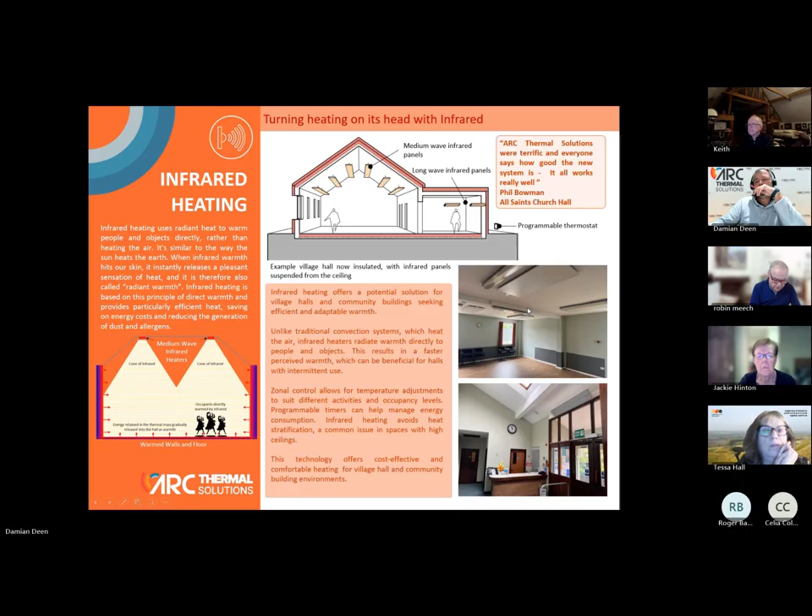Lost sound. Oh, Damian, you're on mute. There you go. Yeah, that's better.

Good. Some halls have acoustic tiles, and we have a hall in Oxford somewhere, I can't remember the name of the hall, but the entire ceiling is full of acoustic tiles. And we were able to install the heaters below the acoustic tiles and suspend them as well. So it can be done. We just need a clearance. In most cases, you need a clearance of 300 mil off another fitting. So in this case here, you can see the light fitting and the heater are over 300 mil away from each other. And the heater is a tad lower as well. This hall is in Nottingham somewhere, if I remember correctly.

So Tessa, can I, because I can't see the questions when I'm doing this presentation. No, I'll do it. For some reason I lost it, but I'll be reading the questions out. Don't worry. That's all right. If there's any more there, that's fine.

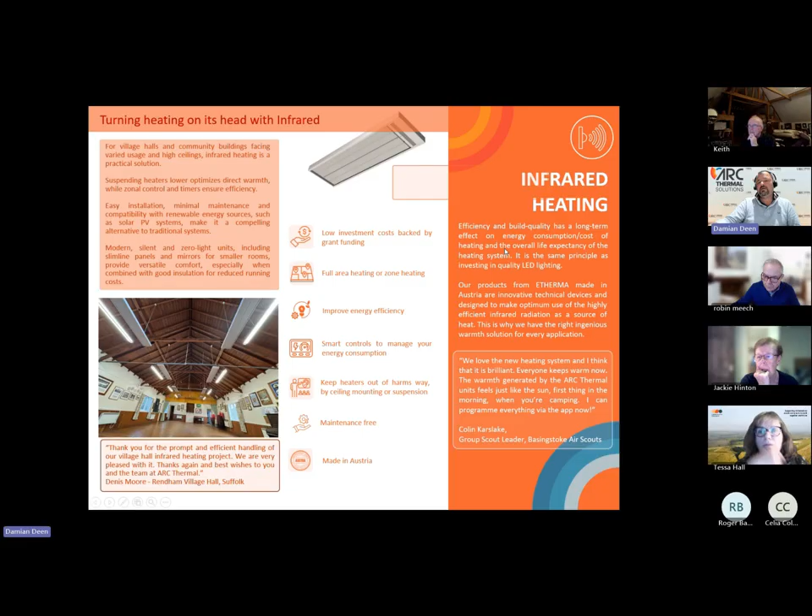So with infrared heating, obviously it's electricity you're dealing with, and if you're able to integrate solar PV with a system, and the cost element is there, that's fine. I would suggest looking at solar PV as well as an integration. Multiple halls in the past have done that, and they've installed not only PV but storage to go with it as well, which means that you can use the power as you need it.

And if you have storage, then great, you can use the stored power in the night when you might have an event, because most halls do have events in the night. You might have film clubs, you might have your social engagements. And I know Alice have just done their solar, so that will be helpful for them in the future as well. Does that make sense? Do you want me to walk through how solar works, or is everybody happy with knowing the integration of that?

Well, I love the fact that you can power the infrared heating with solar panels. But you would need a battery probably, especially for the winter months, wouldn't you? Some cases it's prudent to have a battery, some cases it isn't. And I don't know about these things, but is the infrared heating quite easily powered by the solar PV without a battery then?

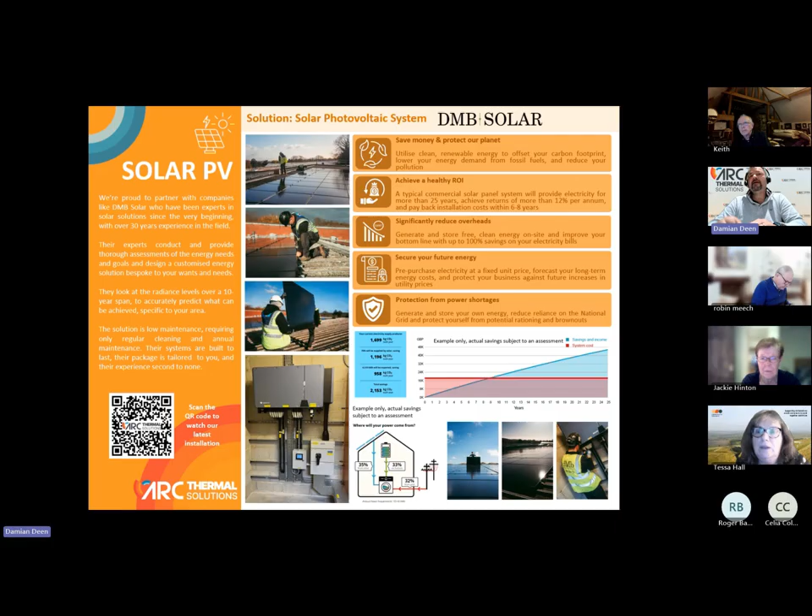So I'll show you a little bit about the surveys that we do and all that stuff, but basically it's a comprehensive offering that we try to put in place for customers. When a customer approaches us, I had a hall approach me this morning, and the first thing I would do is have a conversation with them and just find out a little bit about the hall, a little bit about what heating is there, and get that information. Once we've gathered all that information, we tend to produce a desktop proposal for that customer. I could show you one.

And once we produce that desktop proposal, we'll then take it to the customer and say, this is what we think is the best solution for yourself. These are the cost implications. Is this something that you are likely to be happy with, or is it something that doesn't seem possible? If the customer thinks that is something that they would like to pursue, then we would do a full survey, double check all our assumptions, make sure that everything is, you know, as is, and then sign that off with the customer. And the customer then says we'd like to proceed.

Then we would make a visit like we did today to double check with our installers and see where the heaters are going to go, what positioning, what time of day we can install, where we can store the heaters. Go through the whole planning process at that stage, and then we send that back, and the customer then agrees, and then we move forward. Then we have after sales service as well, which Jackie saw you earlier on today as well. Any other questions?

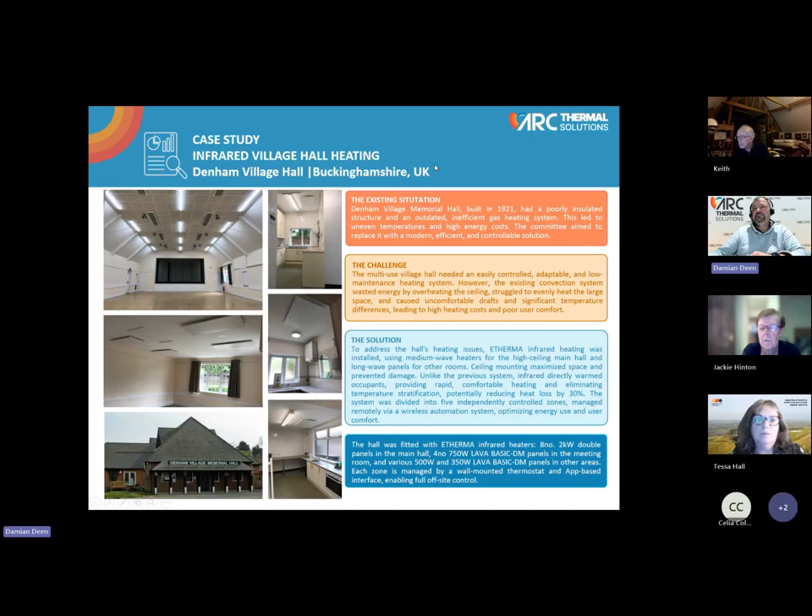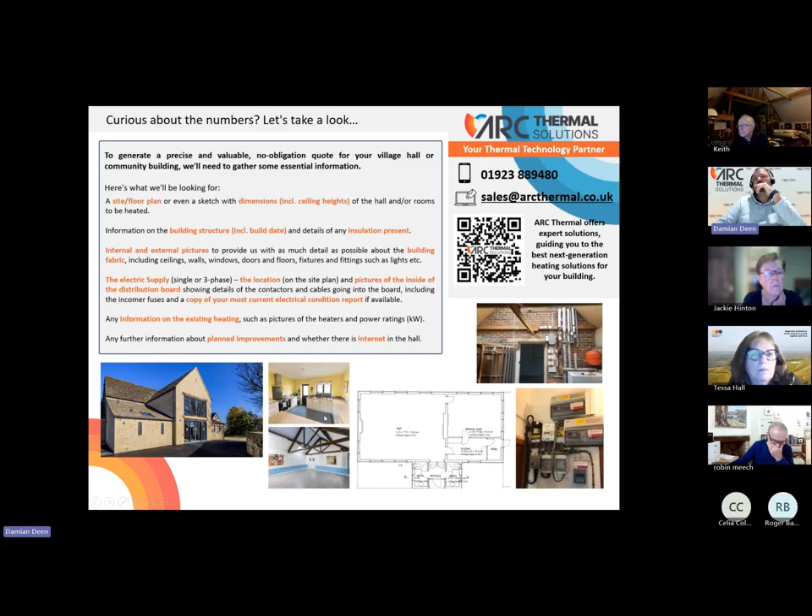Have you got any close-ups of the different types of heaters in halls while we're on the...? Yeah, I can show you that. So when a hall approaches us, we ask them for a floor plan or some sort of idea of what we're working towards. We ask for pictures of the distribution boards and the like, if we haven't been to site, and we gather all that information, and then it spits out the proposal. So I will show you that.

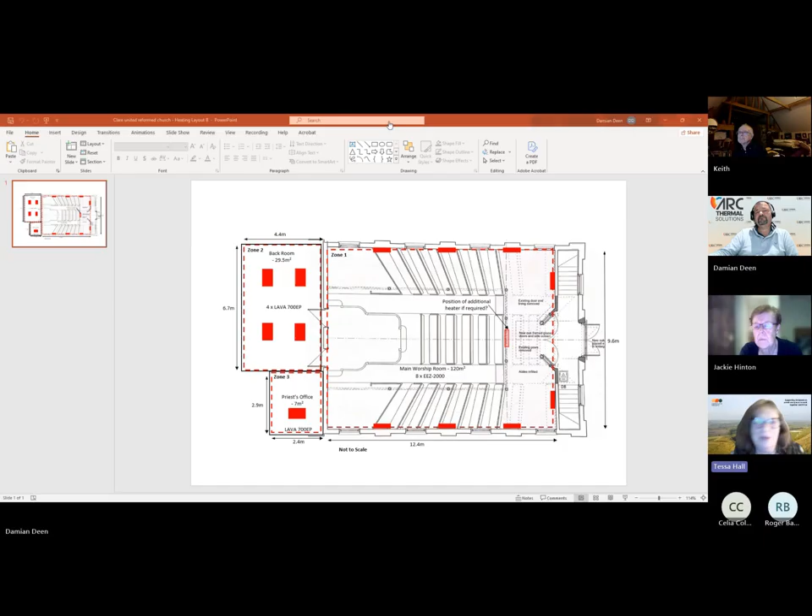Roger's just posted a question while we're on the topic. He says: we are considering installing PV panels, and the hall is not used very often. What are the economics of capital outlay relative to the feed-in tariff?

Good question, and that depends on your present energy consumption at the hall. If you want, I could look at the viability of it based on your energy bills. If you could send me a year's worth of your energy bills, your annual bill, I can see what's possible. Do you have electric heating already at the hall or not?

While Roger's typing, can I ask you—many halls really like to have remote control for their heating, so the caretaker or trustees don't have to actually visit the hall to turn it on. Is it possible to have that, and also have control for the groups using the hall, available in the hall itself?

Yes—with the app we recommend, you have multiple users, so you can add the groups. If you wanted, you could give a group user access to the app. But most halls set the programs for that particular event, like Pilates or line dancing, setting the heating to come on about half an hour before the event and turn off maybe an hour into it, depending on how long it runs.

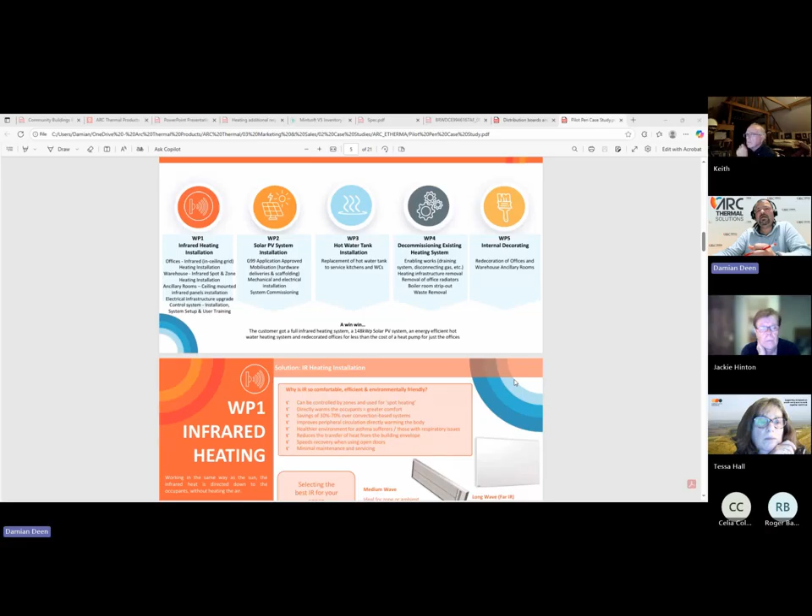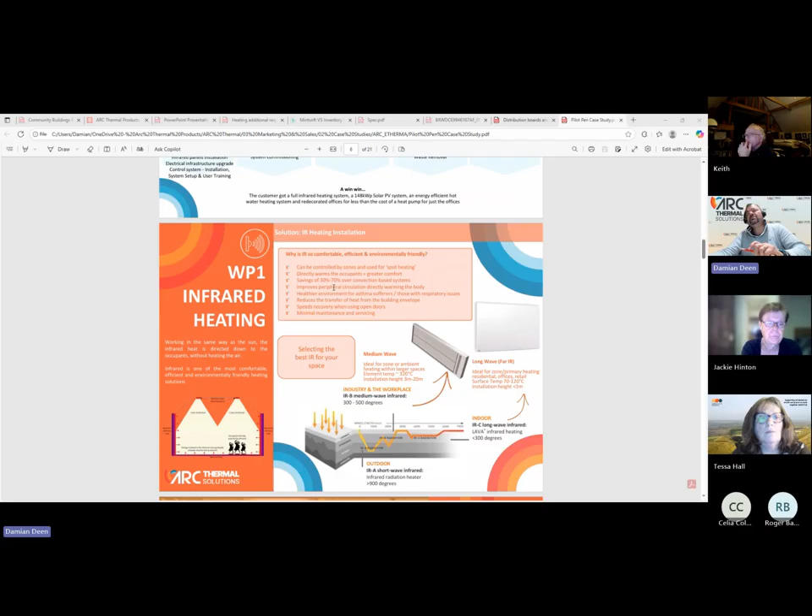So it was obviously a large project, and we used different methods. We went with far and medium wave infrared into different locations, giving them savings. We're still working on that, but it's around 40% overall they've saved thus far. This was installed last year, so they're still looking at their solar - they haven't run it for a year yet, so they're basically monitoring how that solar is performing for them.

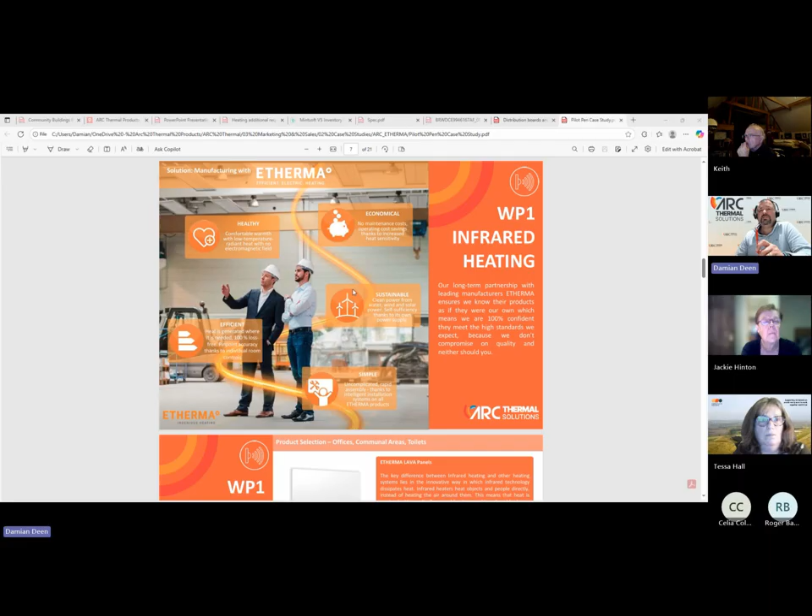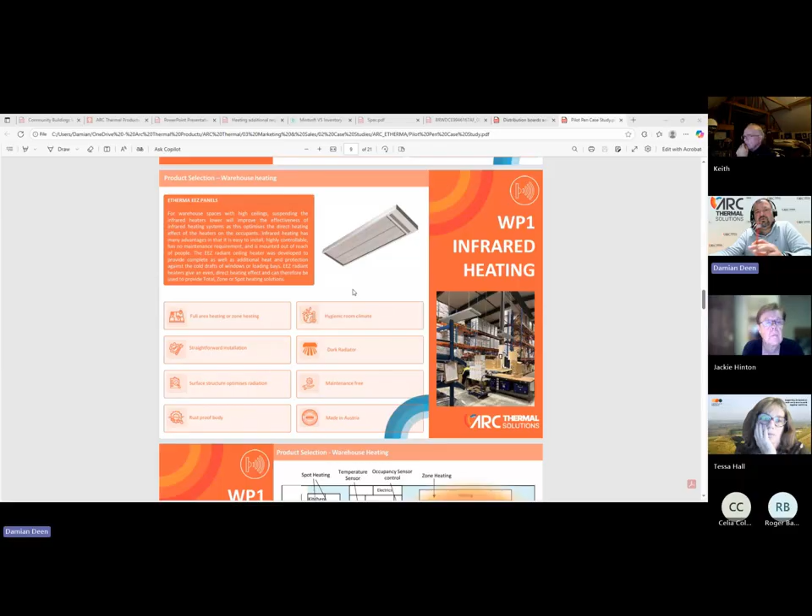The infrared in the warehouses was pretty straightforward, but the complexity is running the cables and getting everything where we need it to be, which I'll show you in a minute. This is just showing what we used and how we went about it. This was one of the hardest parts for us to actually get in place, because previously they had gas heaters in different parts of the building blowing hot air throughout the entire building, which was never warm enough - absolutely never warm enough for anybody.

So what we did was identify isolated areas where we needed heating, and we put those on spot heating areas where we use a PIR system. So that PIR would come on for about, depending, 5 minutes. PIR is, if you understand, an occupancy sensor. So as soon as somebody comes into the occupancy zone, the heating would come on, and it would be spot heating at a target temperature.

What does it actually stand for, PIR? Sorry, oh I see. Right, well I'm trying to get... Oh, I think it's Charles - Charles, you've got some talking. Yeah, you need to go on mute. Welcome, hi Charles, thank you. Hi.

Right, so it's Passive Infrared. Basically it will look at where the objects are. Let's see if I can pull it up. Where is it again, one second. Right, there we are. So it basically reads - so you might have, when you have outdoor heating, where you flash your hand and the lights come on. That's the same process. So it's a PIR sensor that goes into that model.

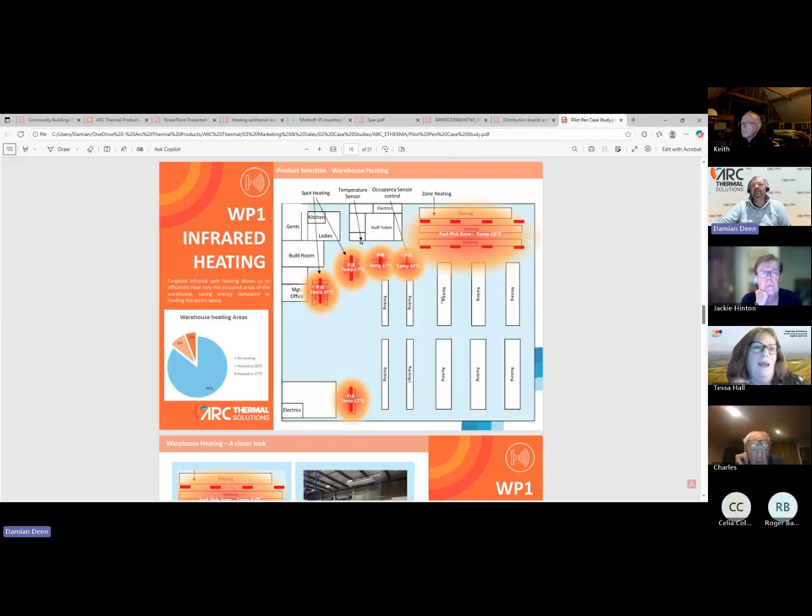No, that's what I'm saying. That particular customer wanted it for their purposes, and we said yeah, but it's not something that we would recommend they do, and they decided that they wanted to do it that way. But they didn't have any other heating in there? No, they didn't. Oh, okay.

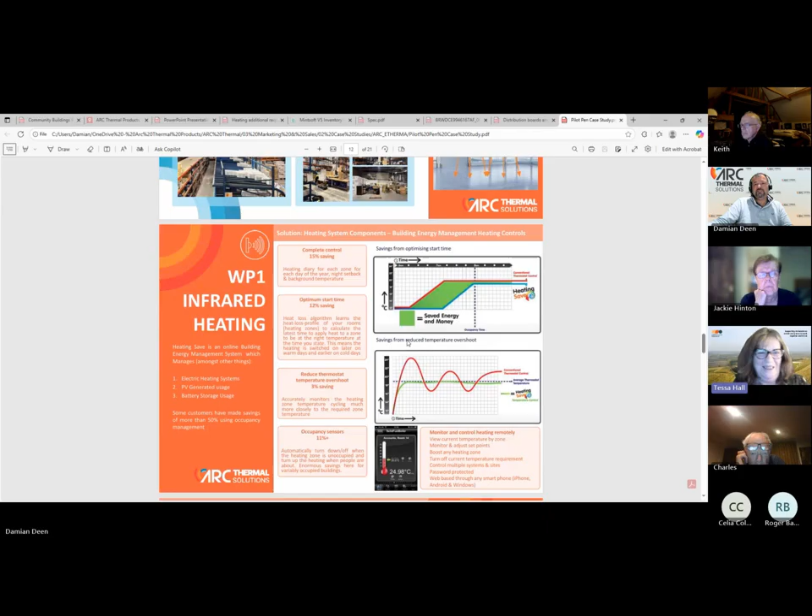We're sort of getting towards time. I'm wondering if we can get back to halls, if that's all right. Sure. I'm sorry, I'm not ruining it for anyone, am I? No.

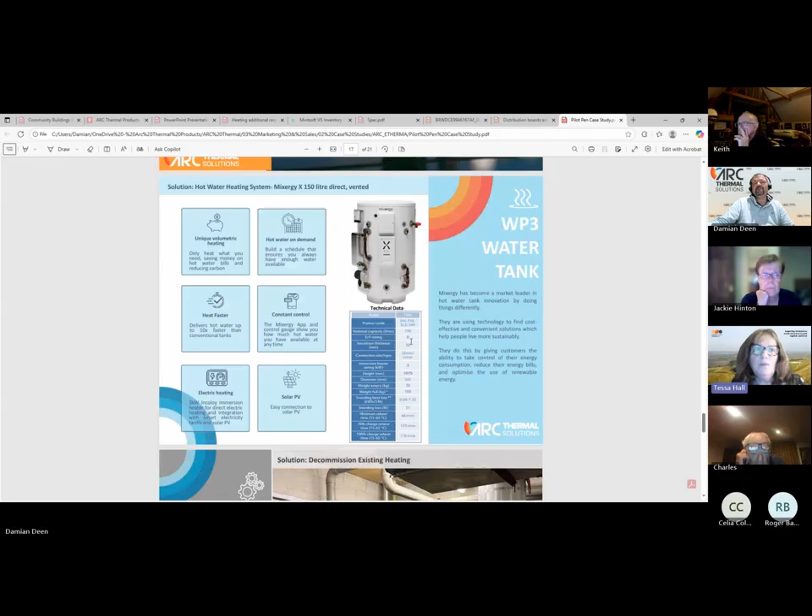I think if we have some hall examples. Mhm. That's the one. So that's Pilot Pen in terms of what we did with them. That's an amazing project. And Kim Bolton, you've probably seen already. Let's see if I have another one for you.

Is anybody here thinking of having infrared? I know Jackie is at Alice Marshall, but are you interested in solar panels as well to supply the power? Yeah. Solar, air source heat pump and possibly infrared, and solar panels.

And we've got some infrared, perhaps enhancing what we've got, because they reluctantly accepted. My husband virtually just did it. He didn't charge any labour, just the heaters, to persuade them to do it, which I think have been successful. But some people think because they heat up so quick, they're taking so much energy. What would you say to dispel that, Damian?

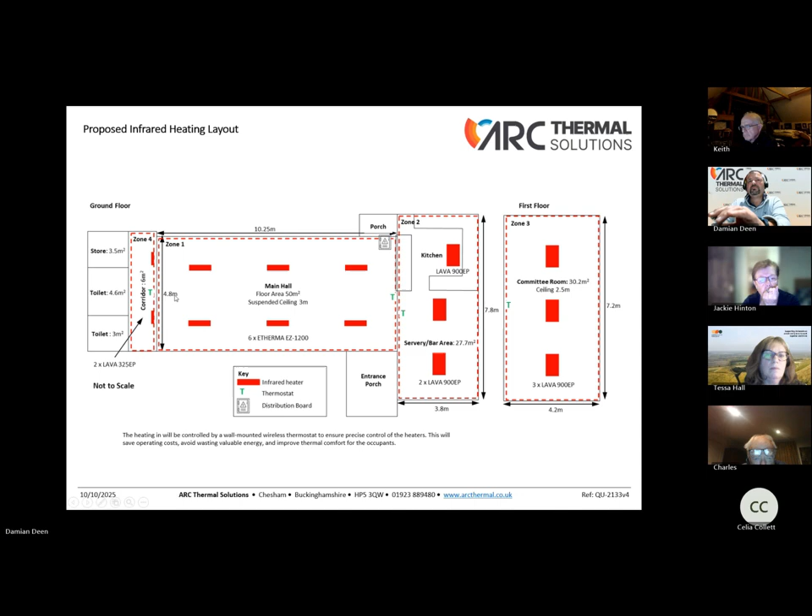We have an overview of the company again. We would have the heating layout of where we would recommend the heaters to go. Heating layout in this case here, we have 6 1200 watt heaters, 3 900 watt heaters in this area, 3 900 watt heaters, and 2 325 heaters in the corridor area. And this is the total energy consumption or energy requirement. So when I told you that we would work on our specification of what watts per square meter we need, this is where it comes out.

So the main hall, it's 50 square meters. We said we want 150 watts per square meter because of the building itself. The building is a stone building in the middle of deepest Devon, and it's a very cool hall. So based on that information, they let us know that we will need 6 by 1200 watt heaters, totaling 7.2 kilowatts, giving us 144 watts per square meter. So slightly short of 150 watts per square meter, but well within the tolerance.

What that means is that particular hall will take a little longer to warm up than if we went with, let's say, 1600 watt heaters. But then you have the cost balance on that because it might be too costly, and then you have the cost of the energy as well. So you have to balance things out here. And 144 watts per square meter in that hall will be adequate with a warm-up time of half an hour.

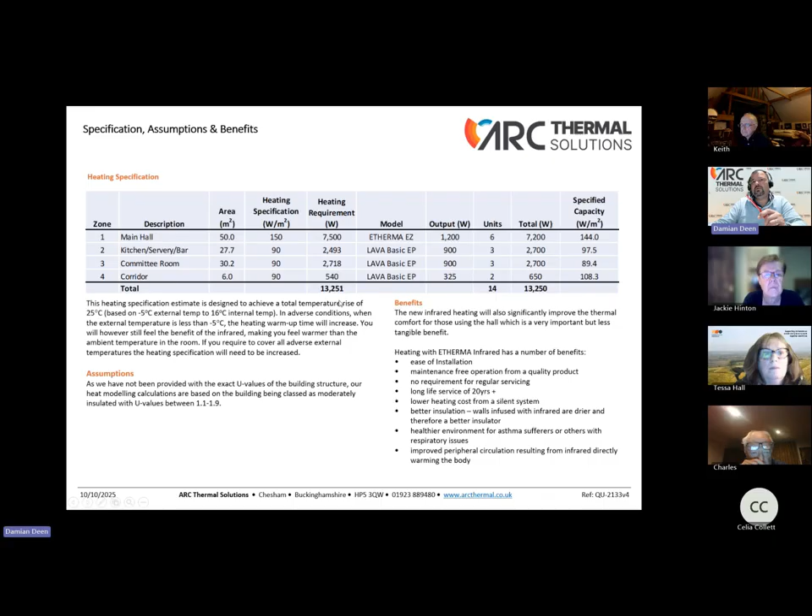And then different areas, similar thing, giving us different watts per square meter, spitting out a total of 13.25 kilowatts needed for this hall. So once we work that out, then we give you an estimated running cost. So we have a warm-up time. And what we mean by warm-up phase is when you're going from half an hour before you get up to temperature, it will cost this hall 1.7 pence per kilowatt.

For that 7.2 kilowatts, it will cost them that to get them up through a warm-up phase, and then a maintenance phase of 58p. The maintenance meaning is if we want to keep that temperature base at 20 degrees for 1 hour or 2 hours or whatever we want it to be.

So this is typically what we would send you, Keith, in terms of the running cost of the infrared. Now we can work backwards and say in a scenario where you have controls, look at it versus gas as well. When you say warming up phase, what are you actually warming up? Are you warming up the walls? We're warming up the walls, the fabric of the building. And the last thing we would warm up is the air.

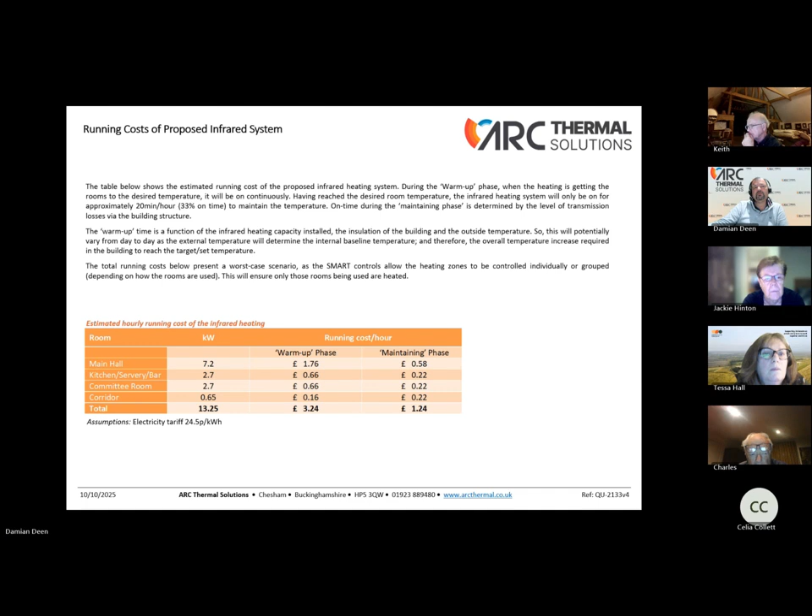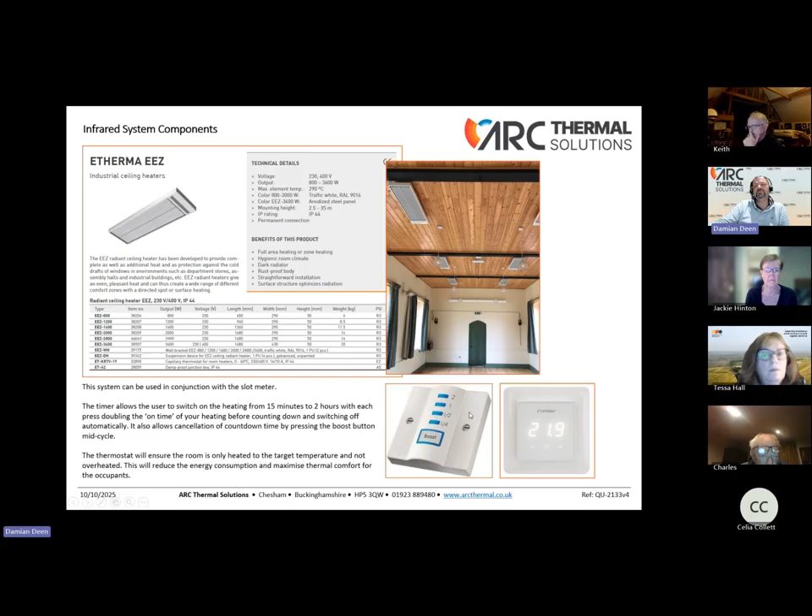Then we identify the products that we are going to use. In this environment, they wanted a time booster as well, but we've discounted that. We just showed them the thermostat. This is the thermostat as a heater, and these are the other heaters going to the different walls. We show you the size of the heaters, and then we go into the controls. So these are the heating controls that we would normally use.

This is the hub that plugs into your router. So this is the brains of the system. This plugs into the router. This talks to the receiver, which is this device, and the receiver talks to the thermostat. So this then talks to the app. So where you have a router, this plugs into the router, talks to that, talks to that, talks to the app. This thermostat is independently agnostic, so you can turn it up and down.

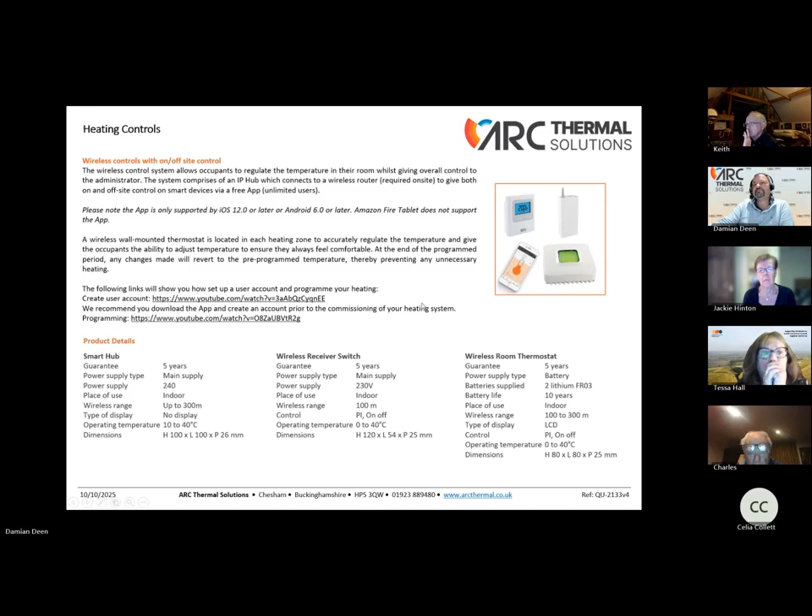Any other questions? Jackie, are you happy now? I am. It's all been really interesting, and I would just like to say that having dealt with you today, nothing seemed a problem, which I think is encouraging to those people who are wondering whether to go with ARC. We quibbled over the colour of the wire because we have beautiful beams and we didn't want grey wire, so we asked for black. And nothing seemed a problem. So I just wanted to highlight that we were very happy with you and your electrician today. Thank you very much for that. That's greatly appreciated.

So has anybody got any more questions? Of course, you can always contact Damian, and I'm glad to hear that you're very patient, because when a quote comes in, then there's the matter of fundraising to get the work. It all takes time, as you know. The longest we've been dealing with a hall was about 6 years, and that finally came off. And even Robin, who was on the call earlier, we've been talking to Robin for about 3 years now. So we understand, and we're patient, and we try and help as much as we can. Yes, Swinbrook is needing a lot of refurbishment, so it's not just the heating. Just to explain.